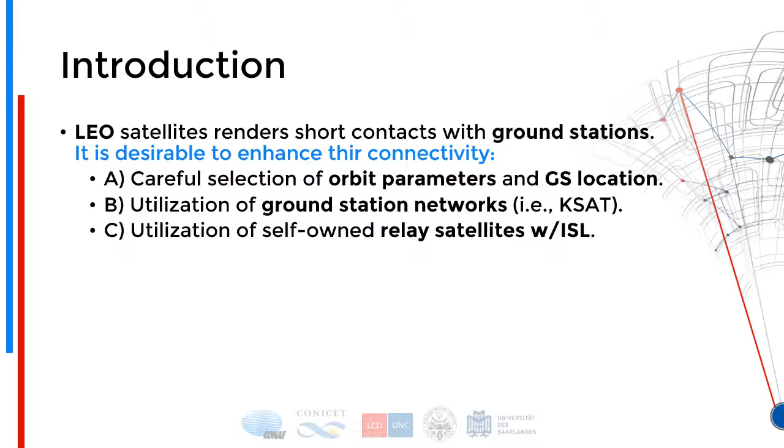But still, it's sometimes desired not to rely on third parties for this type of activity, and an appealing option to do this is to leverage relay satellites, self-owned and self-launched relay satellites that can be used to enhance these already short contacts from space to ground. And these relay satellites are what we are going to be focusing on in this presentation.

So the relay satellite mission design is not simple, and involves quite a big set of parameters. It extends from a traditional satellite mission, an observation mission for instance, and involves different aspects. The mission objective, for instance, defines the data generation process, how much data we're going to need to download, and at which moments this is typically going to happen.

If this is an imaging mission, we will need to take into account at which moment the image is taken, and therefore where is the best place to locate a given relay satellite so that, once the image is taken, it can be transferred via an inter-satellite link to the relay satellite and then downloaded to ground. Keplerian parameters come into play, obviously, for each of the relay and the main satellite missions. One or many ground station locations also come into play.

Then the communication constraints: the elevation at which the communication can be established, the range at which the inter-satellite link can be used. This also involves propagators, to determine what the position of the satellite is going to be in the future, and therefore calculate the access time, or the overall topology of the mission.

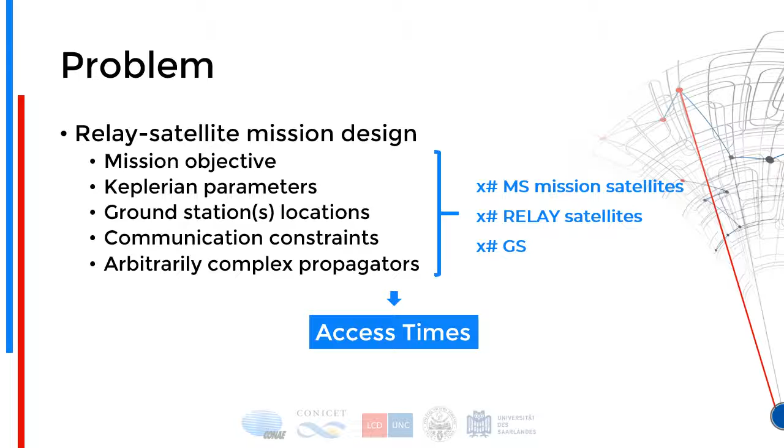All in all, putting all this together, access time can be calculated, and access times between the mission satellite, the relay, and the ground station are what end up defining the quality or value of a given relay-based mission design. The access time is nothing else than a set of time periods, from start time to end time, of which asset is able to communicate with which asset. This is analogous to what's known in delay-tolerant networking as a contact plan.

So this can be used both for analyzing the network in a given scenario, calculating the accumulated access time or the frequency of access with each of the assets, or it can also be used for scheduling, predicting what's going to happen in the network in the future and scheduling related activities or communications, or booking resources in advance.

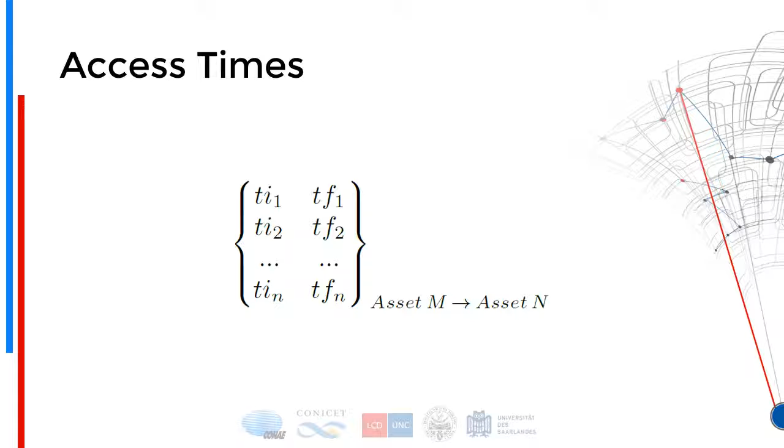But let's try to break this apart a little bit and try to classify the different accesses that we're going to be dealing with, so we can actually define and try to optimize what can eventually be a relay-based mission.

So obviously, the most immediate classification that we can get from access periods or access time are those accesses which are direct access from the ground station to the mission satellite, and which obviously happen in real time, as the mission satellite is able to directly send the data that it has in memory or that it is acquiring at the contact moment to the ground station. So this is one type of contact or one type of access that we can be dealing with in a relay-based satellite mission.

Where we can go from here is, beside having this contact between ground station and the mission satellite, we can also have contacts at the same time between the relay satellite and the mission satellite, and the relay satellite and the ground station. This is another possibility of communication, another topology that can happen at any given moment. But in general, this has not a major impact, as when this type of communication is present, one generally chooses to download the data directly from the mission satellite down to the ground station and basically ignore the communication with the relay.

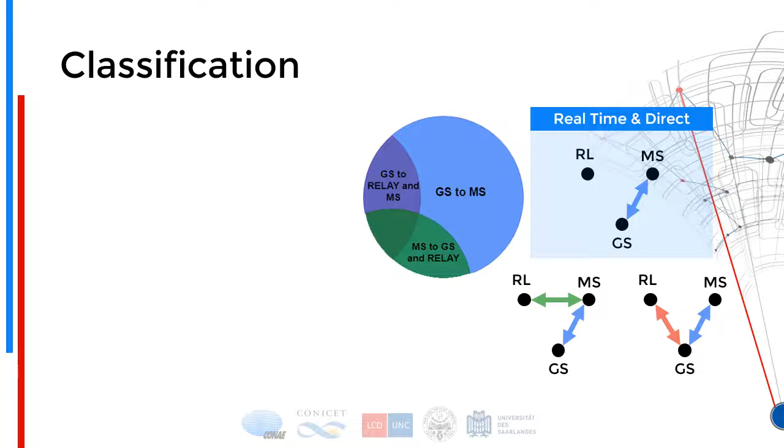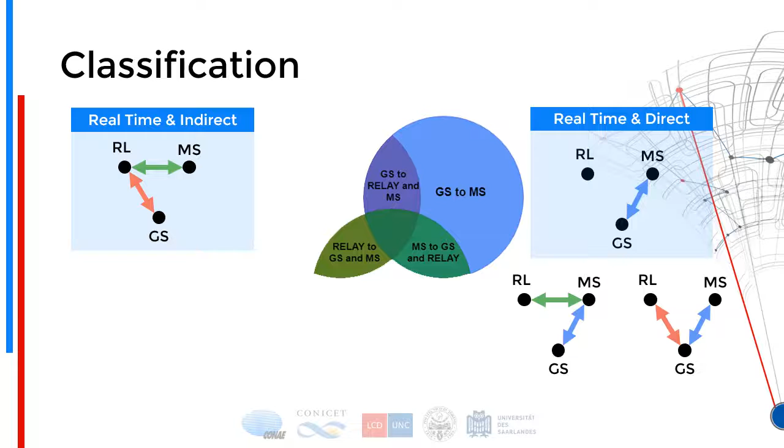An interesting alternative, another way of thinking of what type of accesses can happen simultaneously, is when I have an access from the ground station to the relay, and at the same time I have an access from the relay to the mission satellite. And this is a relay case, when the mission satellite can deliver data to the relay and the relay delivers data to the ground on behalf of the satellite. And this also happens in real time, as soon as the data is received by the relay, it can be immediately forwarded to the ground station. So we are in a real-time case and an indirect case, as the mission satellite is not talking directly with the ground station, but through a relay satellite.

And then to complete the possibilities of accesses, we also have direct access from the ground station to the relay only, and from the relay to or from the mission satellite only. These cases are of no value in case real-time access is required, but might be of value when relying on store, carry, and forward networks, also known as delay tolerant networks. Because in this case, I can use the inter-satellite link between the relay and the mission satellite, and then in another moment, exploit the access to the relay from the ground station and get the data down to ground as fast as possible. So this type of access can be of interest if and only if store, carry and forward data download is sought or accepted in the relay-based satellite mission.

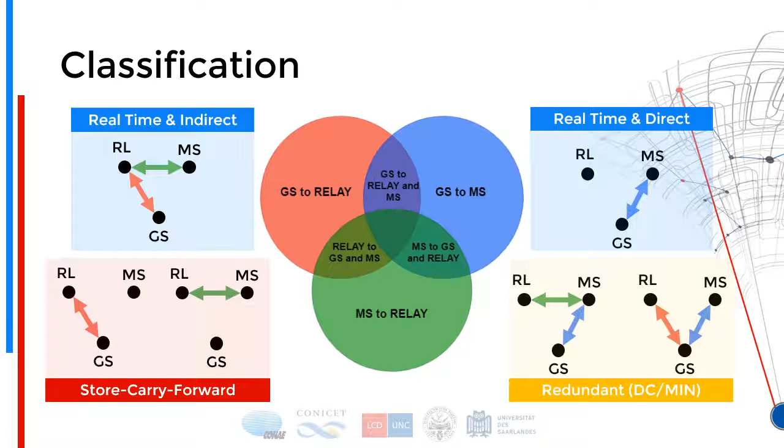And as mentioned, these cases where there is a simultaneous contact between ground station and the mission satellite, and also between the mission satellite and the relay, or the relay and the ground station, are typically redundant contacts that can be just ignored, also known in the optimization world as don't care, or some effect that we might want to minimize as well. So all in all, in this image, we have a taxonomy of the types of accesses that occur in missions where you have ground stations, the main satellite missions, and also relay satellites playing their role in this network.

Based on this taxonomy, we can derive different cost functions, so we can characterize and measure how good or how bad are the networks that we can study, and arbitrary cost functions can be defined. This is just an example that we use in this paper. In this case, we're assuming that we do want real-time and indirect access, and we don't want to have store, carry and forward.

And this is why we have as a positive factor in cost ground station to relay only and mission satellite to relay only, which are costly for us. This is something we don't want. This is adding cost to the system, and we want to minimize this effect.

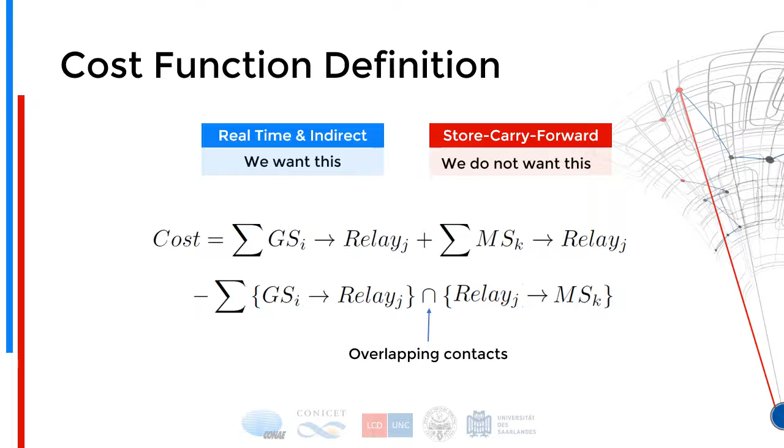On the other hand, on the second row, there is a minus symbol in the summation here, something that reduces cost and is therefore desired in the system: when we have simultaneous overlapping contacts between ground station and relay, and relay and mission satellite at the same time. So this is where we want to have an optimal assessment. We want to maximize the possibility of having a relay access to the mission satellite from the ground station.

And once we have designed this cost function and also have defined what are the axes that we can play with, we have chosen to model and analyze the system via what's called simulated annealing optimization. And simulated annealing is a combinatorial optimization that avoids falling into local optimums by sporadically or probabilistically enabling or allowing what are called downhill moves.

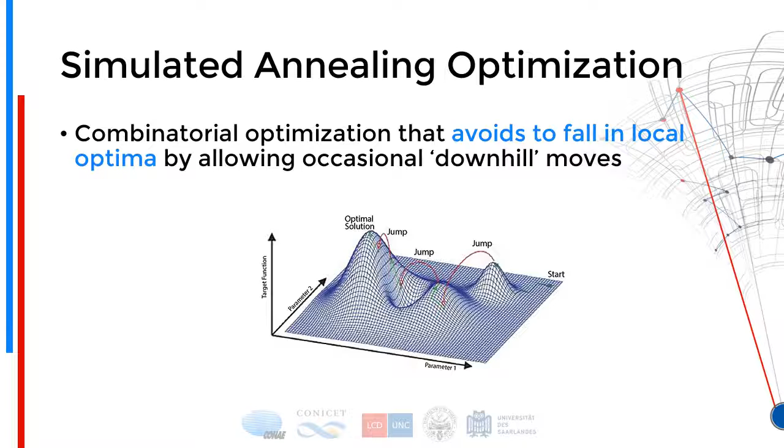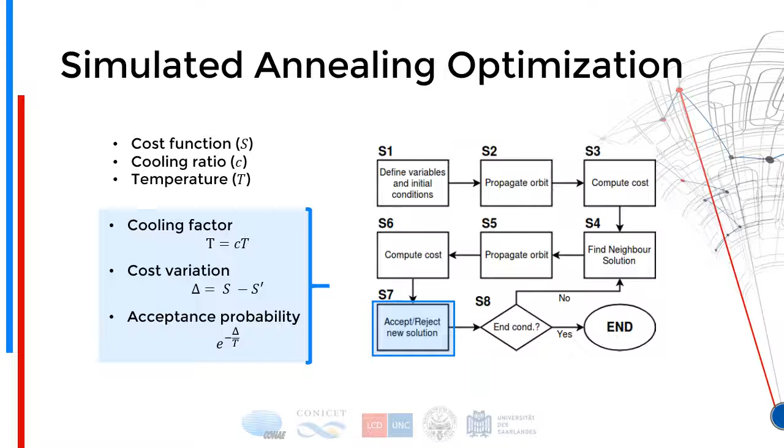And eventually this becomes basically a search algorithm that seeks through the solution space the best set of parameters that maximizes a given metric or minimizes a given cost function. And the parameters that we are considering, which are defined at the initial point of the algorithm, are also redefined or modified in the neighbor definition step on S4. We basically have the ground station latitude and longitude that can be either fixed or can be expressed as a possible set of ground station locations to diminish the quantity of possibilities that we can search. And then for each mission satellite and for each relay satellite we can modify semi-major axis, inclination, longitude of the ascending node, argument of periapsis, eccentricity, and so on.

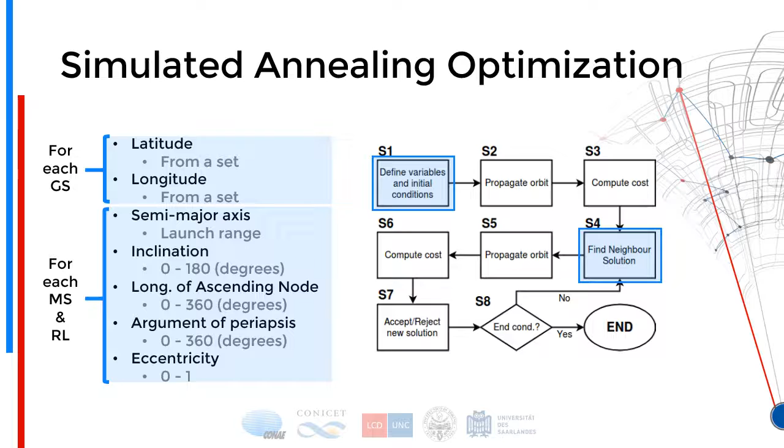And each one of these parameters has a constraint, which is the range of values, and we can generate random values within this constraint and push the algorithm to explore these different sets in the expectation of finding a local or hopefully a global optimum that maximizes a given cost function such as the one we showed before.

A key element here is that for each iteration we will be propagating all the scenarios. So this is a computationally expensive effort depending on the accuracy of the propagator that we are using. Typically there are some simple propagators like J2, medium complexity propagators like SGP4, or high precision orbital propagators which are numerical approaches to propagation and can take a non-negligible amount of processing power to solve. So this is something we will try to tackle. We want to minimize these iterations as well in order to reach a local or a global maximum. And we leverage these propagators by using the Systems Tool Kit software from AGI and combining this software via open interfaces with MATLAB, where we use MATLAB to control the STK software.

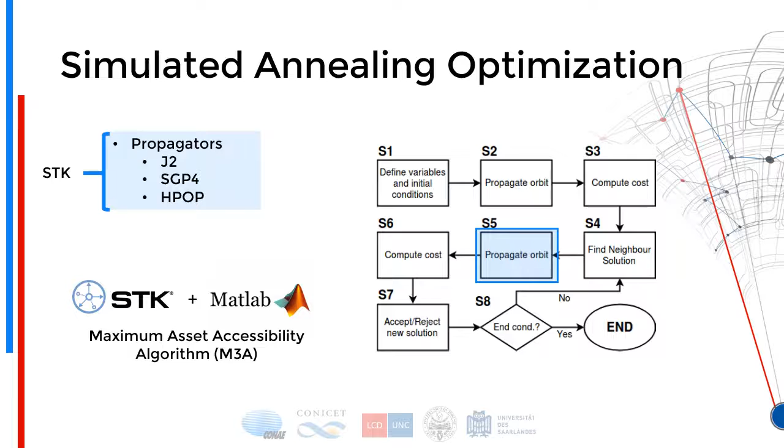So we express this in a case study where we have two ground stations and one mission satellite with a defined orbit, and we basically vary a given set of parameters of relay CubeSats. We have fixed some constraints, so the same circular orbit, and the phase shift between the CubeSats is also constant, so the three CubeSats will be deployed in the same orbital plane, in the same orbital trajectory, but separated by an equal angle between each of them. So the separation will be constant. Now we will play with the inclination value, the RAAN value, which is similar to the longitude of the ascending node, and the argument of perigee of the orbit. So we will play with these parameters and try to minimize the cost function that we have previously shown in the earlier slides.

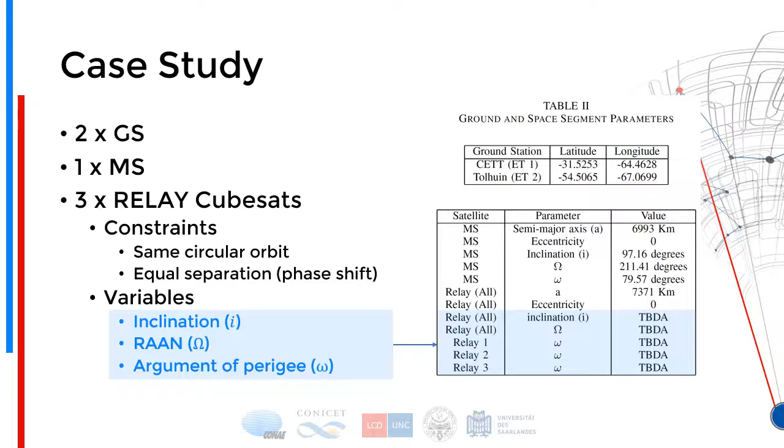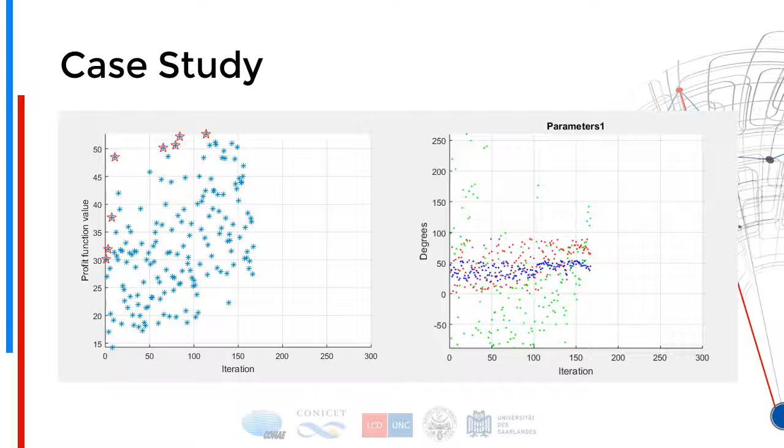And as the algorithm searches for this, it recalculates on each iteration the metric that you are interested in, which is basically a cost function. In this case, this cost function is expressed in percentage of time. So what we're saying here is that if we are around 50, the access time to the mission satellite is on average 50% of the time, which is quite a good metric actually. Considering that a typical LEO satellite can have at the very best 4 visits to the ground station of less than 10 minutes, this is actually quite a good metric.

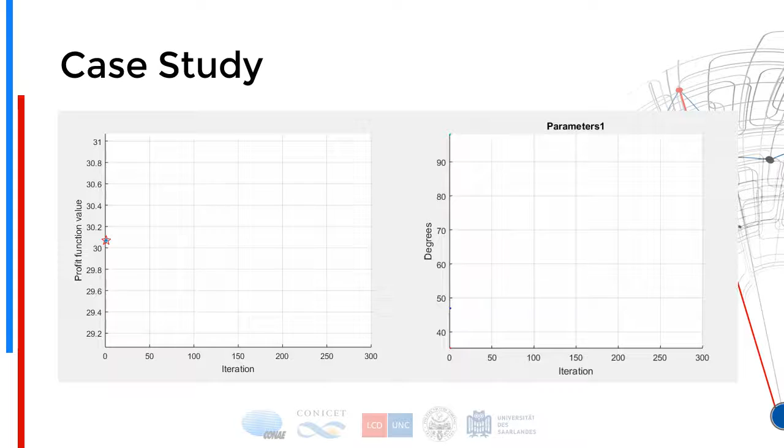And this is how the metric varies, and how the different angle parameters also vary in the animation on the right. What's interesting to see is that if we compare a brute force approach, where we basically sweep through all the possible discretization space from the evaluated data, we hit the optimal right at the end of the brute force calculation, which is around 4,500 iterations. And this is quite a lot, since you need to run 4,500 propagations for the scenario that you have defined. So this is not a trivial effort.

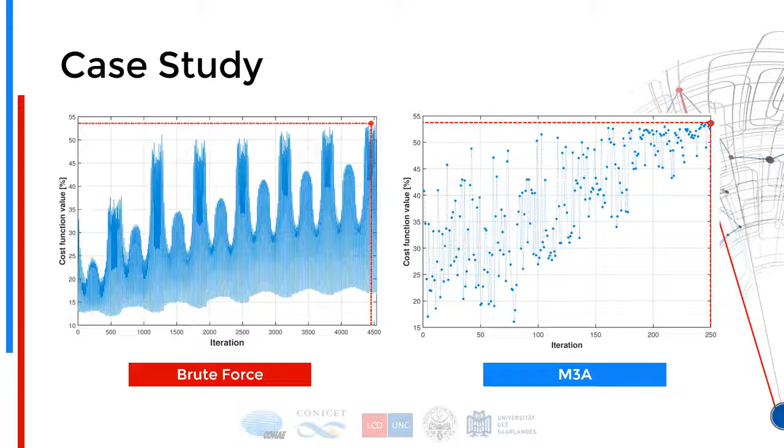And then on the right, we have the simulated annealing solution, which can reach, if you take a look, effectively pretty much the same optimal value, the same percentage, but only at 250 iterations. So the difference is quite noticeable. These are more detailed numerical results of the difference. This is just to show how close the simulated annealing algorithm gets, providing a real and implementable solution through the software.

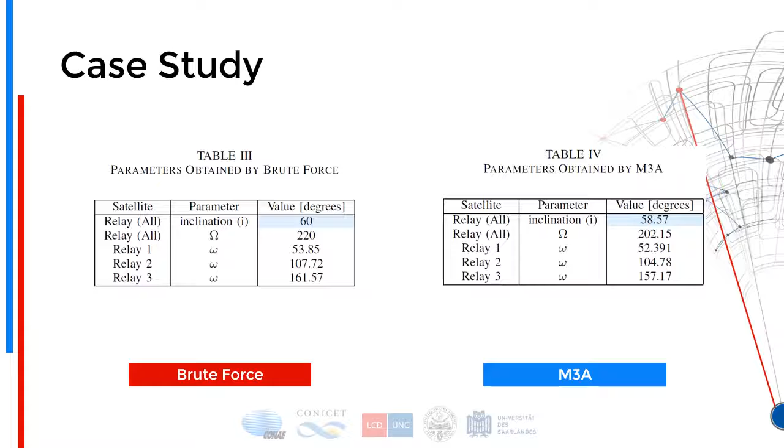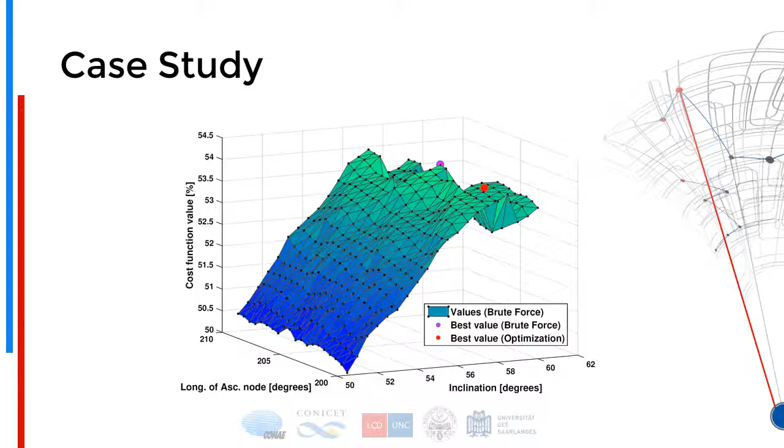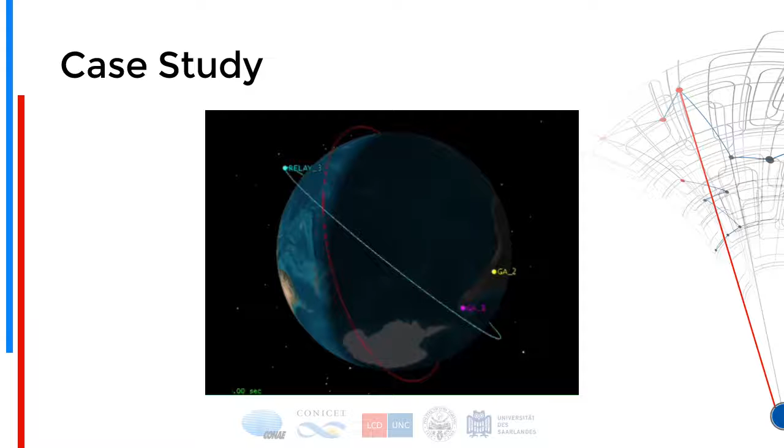And let me insist that this is a generic approach. We can change the cost function, we can change the orbital parameters, and we can change any of the mission parameters. We can easily process different data and obtain the results for a given maximization or minimization metric we are interested in with simulated annealing.

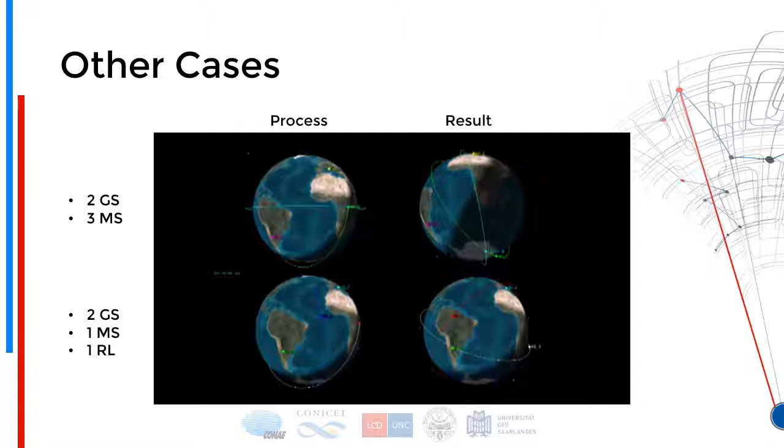So, as a summary, simulated annealing was proposed to support the rapid design and study of missions based on relay satellites. Case studies have shown that 58 out of 60 degrees, actually 97% of optimality, can be obtained via simulated annealing at a dramatically reduced calculation effort of only 5.5% of the iterations. This is very important because the orbital propagation effort is quite costly, and if it can be reduced or controlled, this is always an advantage.

The next step, which we're already working on, is testing the difference with genetic algorithms. So far, what we're seeing is that genetic algorithms outperform simulated annealing, especially in larger scenarios where simulated annealing has a hard time converging on a good solution. So genetic algorithms are already showing that they're more capable of solving this type of complex problem with so many free variables that you can choose to test the different solution space.